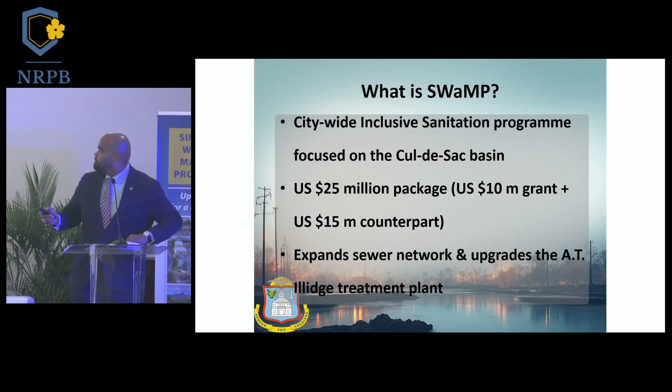More than 9,000 kilograms of nitrogen per year enters the Great Salt Pond. Yeah. And of course we have, thank you. And of course we have about 9,000 kilograms of nitrogen per year that enters the Great Salt Pond. A large part of that comes from effluent runoff of sewage systems. And of course, those are for two reasons. One, because of aging infrastructure challenges, but also because a number of persons, as I indicated earlier, continue to illegally dump raw sewage into our communities.

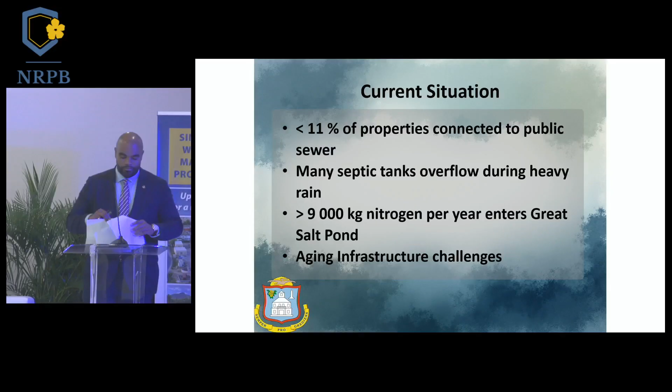Now, there are a number of key challenges that cause a lot of these problems, and that we aim to address through a number of interventions. One of the first challenges is rapid tourism growth over a number of decades, which has increased wastewater loads across our communities. Secondly, the supply chain delays. And thirdly, the issue of public awareness, community buy-in. Wastewater is out of sight, out of mind, a government's problem. And this we aim to change with this project. Wastewater is not a government problem. Wastewater is an us problem.

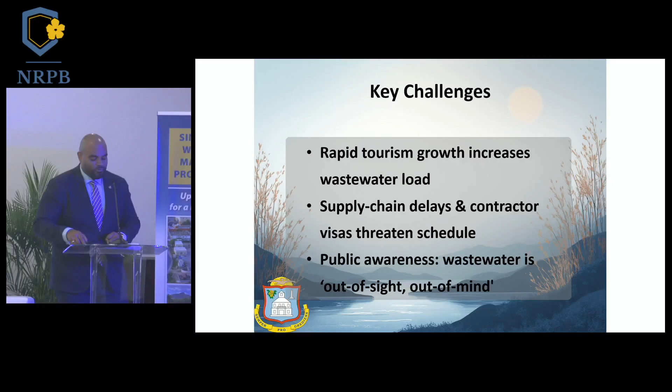So what are the project objectives? The first is to protect public health and marine ecosystems. Most naturally, a clean environment, better quality of life, and improved infrastructure due to the lack of sewage on roads safeguards our tourism, which is the backbone of our economy. And of course, provide reliable, climate-resilient sanitation for all persons.

The project itself has the following core solutions to achieve this. The connection of up to 1,400 new household connections in the cul-de-sac basin, the increase of treatment capacity at the A.T. Illidge Road wastewater treatment plant, and most importantly, what's really key today, the behavior change campaign. As Minister, I can put all the infrastructure in place to support and manage wastewater. But if as a community we continue to illegally dump or choose not to connect and not dispose of sewage correctly, we're going to have a problem. So it takes all of us in the community, and a very key part of the behavioral change campaign is what we as government are going to do to ensure compliance, but also awareness of how things should go.

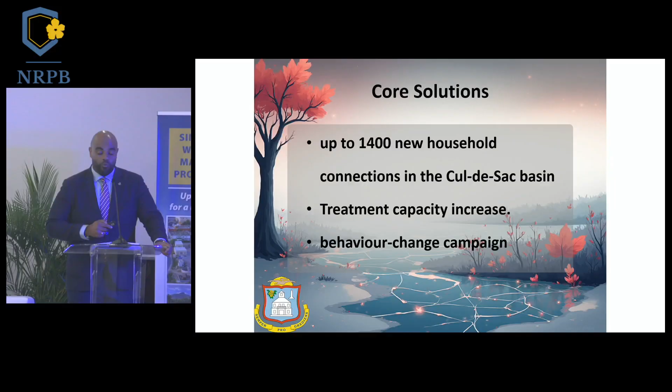So one of the key things we're focusing on, very much like our solid waste project, is the creation of a waste authority to manage the future of sewage wastewater treatment. Secondly, the introduction of household contributions. Back to Claret's statement from this morning, nobody thinks that paying more is sexy. But the reality is, if you don't pay for services that we need, what's even less sexy is sewage on the road. So a big part of how we manage the future of wastewater is through a very strong financial framework, which will include household contributions.

Now, finally, the project timeline. I won't go too much into detail, because I think this will be covered more by the project lead. But in short, 2024 will see a detailed design and the environmental impact assessment. 2025 will see procurement and contractor mobilization. So, of course, 2024 has already passed. 2025, looking at procurement and contractor mobilization. 2026, 2027, the actual project. So a large part of what's going to be happening is network construction and plant upgrades.

We're very, very aware that the cul-de-sac region is a naturally congested area. You either live there, one of your children goes to school there, you have a godchild going to school there. Most of the population has some element of activity going on in that area. So a large part of what we're going to be doing, in particular with the Ministry of Justice, is looking at how we mitigate the nuisance from the planned intervention. This includes things such as alternate routes in and out of the cul-de-sac area, scheduling and monitoring what happens in and out of that cul-de-sac throughout the day to mitigate the impact of large-scale construction.

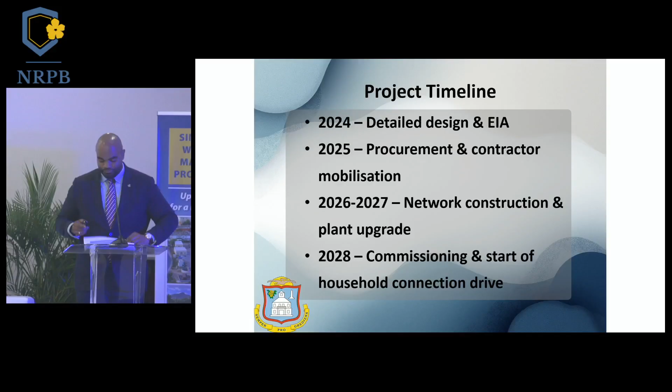Of course, the question always becomes, who benefits? And I think this figure is incorrect. It's definitely more than 11,000 residents who will gain direct sewer connection. The entire population, roughly 43,000 people in Sint Maarten, will enjoy cleaner coastal water.

Why? Because what we've seen over the past, at least from me as minister for the last year, you've witnessed a lot of persons who empty raw sewage into stormwater drains. So where naturally clean water should be running, you oftentimes see sewage water. That sewage water runs down the Cul-de-Sac basin, ends up in the ponds and into the sea.

Now again, not only for the sake of tourism, but also a large part of Sint Maarten does bathe in the Great Bay Basin. So it's not only about tourism, and I think the idea of this project is really to bring home that we have to stop looking at environmental protection as something for persons not from here or for tourists. It really does benefit us in our quality of life. No one wants to walk through sewage water or swim in it.

And then, of course, 1.5 million cruise tourists, 400,000 stayover guests protected from beach closures. As you can imagine, oftentimes, and it happens quite a lot on the front side, when there's a large amount of effluent into the waters, beaches have to close. And of course, if your economy depends on tourism, people lying on the beach means drink money. If you don't have that, you have an economic hit.

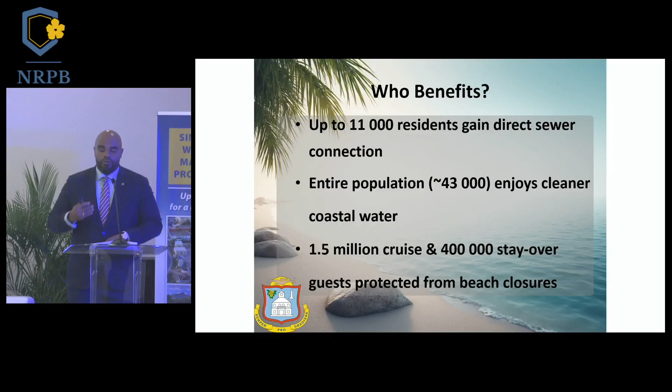At a glance, the benefits: health, fewer waterborne diseases; tourism, clean swimmable bays, and sustained jobs and revenue; environment, impactful nitrogen load reduction to Fresh Water Pond and Great Salt Pond. And of course, jobs. An estimated 120 construction jobs and an additional 10 to 15 long-term operation and management positions become available with the introduction of this project.

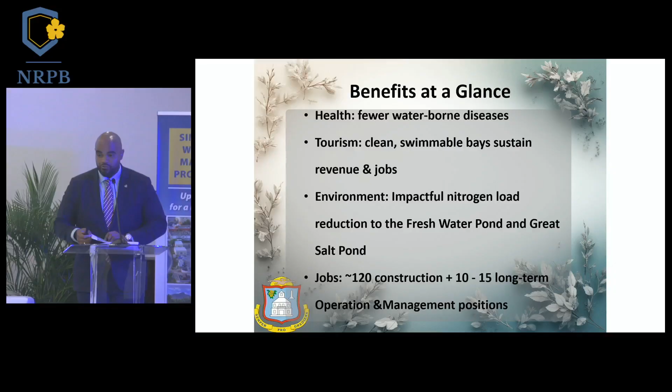So, what do we need from you? Connect early when sewer mains reach your street. I think that's very critical. A large part of this project will, of course, cover those connections as part of the project scope. So the earlier you get in, the more likely you are to be connected as part of the project budget.

Very simple, keep wipes, oils, and grease out of the drains. We don't have to wait for this project to come to Cul-de-Sac to start doing the right thing. Oil and sewage do not belong in our drains. And I can't recall how many times as Minister of VROMI I have been called: Minister, there's sewage running in my road. Okay, can you file an official complaint? No, I don't want my name out there, just send somebody to come and see.

The reality is, and I told everybody, it really takes community and all of us. Nobody wants to be known as a snitch, so to speak. But if you really look at what we're trying to do here, it's really about community engagement and doing your part. Being a good neighbor is more than just sharing a mango or some sugar. It's really about making sure that what you wouldn't want for yourself, you don't do to other people as well.

And most important for everybody, both online and here, share your feedback. There is an active QR code in the front, and I think it will be shared online as well. And your emails with any questions, and really stay engaged about this project or what we're doing as a government.

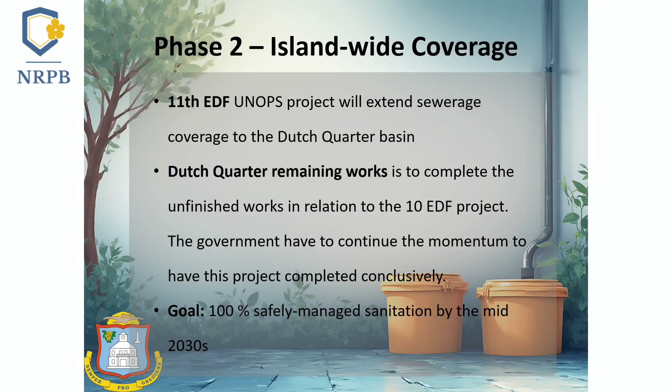So I'm actually very happy to announce here today the 11th EDF, which is a project I remember from my time at Foreign Affairs when we did this back in 2013, the signing of this agreement for the finalization of the Dutch Quarter Basin community connections, which have never actually materialized. We recently, as Ministry of VROMI, with UNOPS, signed on to an agreement to extend sewage connections in Dutch Quarter. This year, we finalized the connection of the lifting station.

And of course, we're very proud to announce as well that in tandem with the United Nations Office for Project Services, we will be finalizing those connections for the homes in Dutch Quarter at the same time that we're doing this project in Cul-de-Sac.

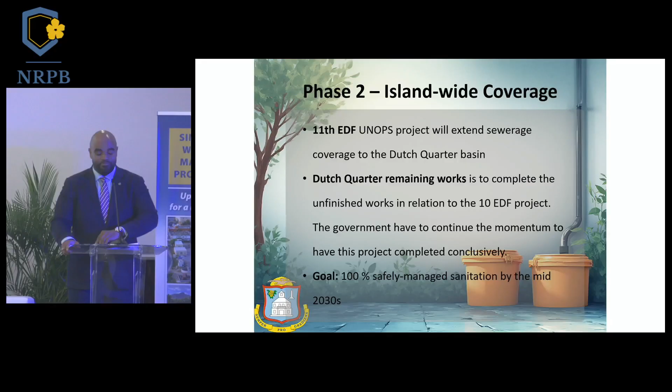So very important is to be aware there'll be a lot of infrastructure projects in the next 18 months, starting in Q4 of next year. We're very proud of it, of course, because there's some long-standing issues within the government that are still pending, but we are very cognizant of the fact that we have to do a lot of mitigation work to sort of minimize the nuisance of infra projects in the densely populated areas of the country.

The remaining works, of course, will be completed, and the government has the continued momentum to ensure that the project is completed successfully. And finally, the goal is 100% safely managed sanitation by the mid-2030s. In closing, wastewater management is community engagement management. Let's act together so that what's flushed in the cul-de-sac basin doesn't end up in Great Bay.

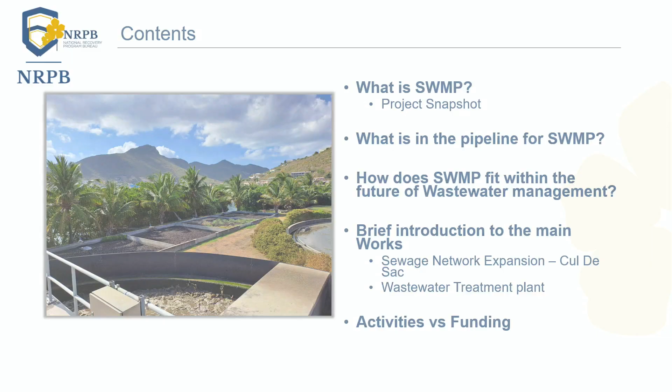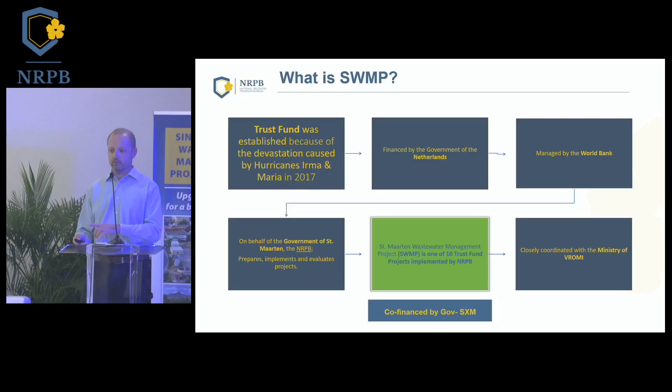So just a brief story of where this project is coming from. The trust fund, as you know, was established after Hurricane Irma in 2017, and based on the funds mobilized by the government of the Netherlands and managed by the World Bank, the NRPB was created on behalf of the government as an implementing unit. Out of this, 10 projects were identified to implement the funds. One of those is the one we are presenting now, SWMP, the Sint Maarten Wastewater Management Project. The official start date was in August 2024.

The funding was already mentioned by the minister, but outside the 25 million that are already being mobilized, there are potentially 5 extra million that are going to be confirmed, and they're going to be part of the funding as well.

The main objectives of this project are not only the infrastructure that was presented, the expansion of the network and the upgrading of the plant. It's also going to strengthen the capacity of the sector, more specifically the Ministry of VROMI, to cope with the challenge of wastewater management in Sint Maarten.

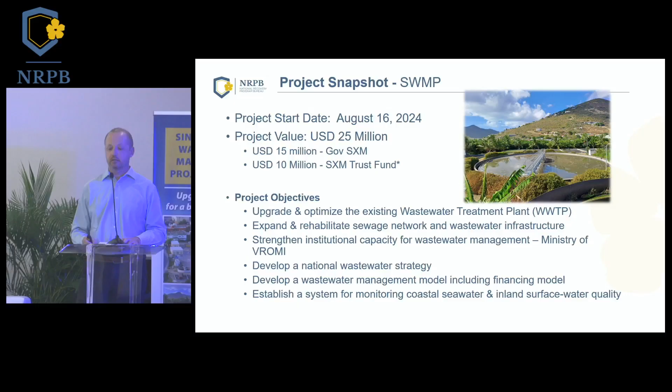Support also the development of a national wastewater strategy to guide policy for future expansion, and also develop a model, including a financial framework model, to ensure sustainability of the system, because once all the infrastructure is done, we have to ensure that it is going to be sustainable.

And finally, one of the objectives of this project is to establish a system to monitor the quality of the seawater in the coastal area and also in inland water bodies.

In the pipeline, immediately we have the main engineering project, which is the expansion of the wastewater network in Cul-de-Sac and improvements of the plant. More technical details will be provided in this presentation. We also had an independent review of the sludge management approach. As you know, dealing with the sludge produced in the wastewater treatment plant is a high-risk activity.

Early next year, we'll start conducting an inventory of households that are potentially going to be connected to the network. So we need to make this inventory, and also have an overview of how the individual connections have to be done, the budget and everything, before contracting the next contract, which is the extension of the network, but also the private connections that have to be done in parallel. I will show you a schema right now.

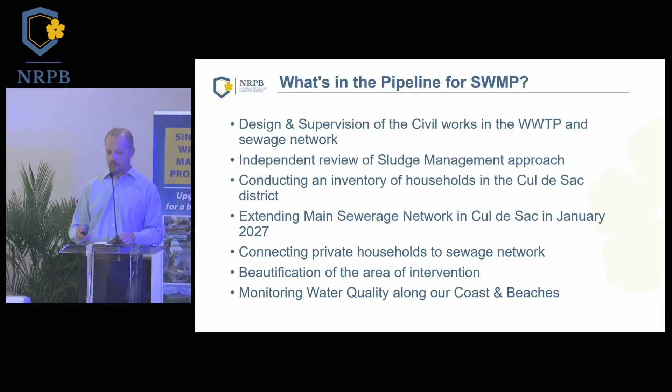And finally, in order to implement the last objective I presented earlier, we are going to start with the monitoring of the water quality, first to see how this intervention is affecting the environment in terms of improvement.

So in order to understand how this project fits with the future of the sector, one of the objectives is to support the government's roles as a planner and as a regulator, because these figures are now a bit vague in legislation. This project will also support updating the policies and ordinance that are now in application, but there are some gaps in this legislation. So we are working with the Ministry of VROMI to upgrade these policies and this legal framework.

And also to support the institutional strength of the Ministry of VROMI as a regulator and policymaker in the sector, and to create a sustainable financial model to ensure that it's going to be sustainable in the future.

Also, one of the objectives related to the sector is to promote partnership and innovation. So private sector engagement is very important, and to support the national wastewater strategy to ensure the future expansion is done following the policy. And the main focus of the overall intervention related to the sector is, as the minister mentioned earlier, to reduce the pollution in water bodies.

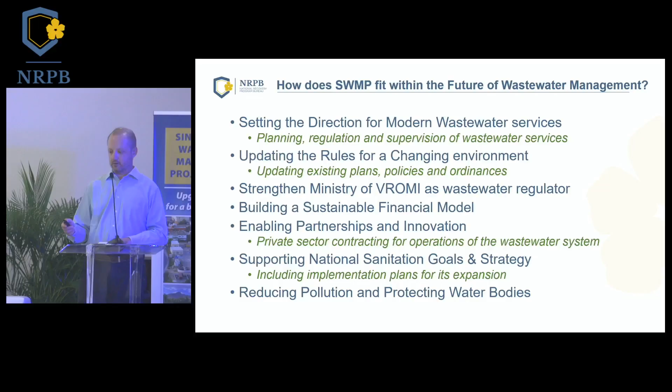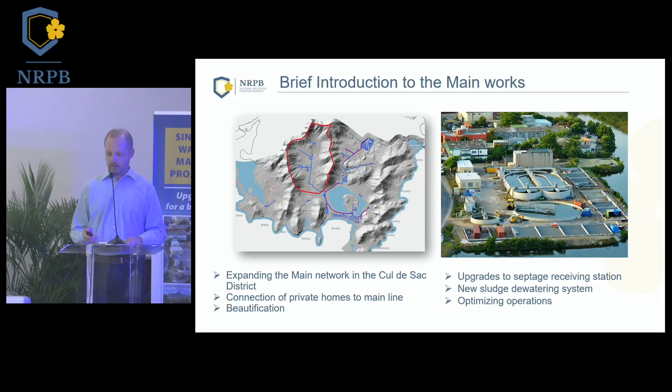So more precisely, the area of intervention of this project is going to be Cul-de-Sac, with some particularities that I will explain, and also the improvement of the treatment plant in Fresh Pond. The expansion is in the design phase. We are now only on the design. It's the picture you see on the screen.

So the design is taking the whole Cul-de-Sac right now. These are the red pipes you see on the screen. The black spots are the condominial systems that already exist. So this project will connect those condominial systems that are now disconnected to the main system, and then connect the whole area to the treatment plant.

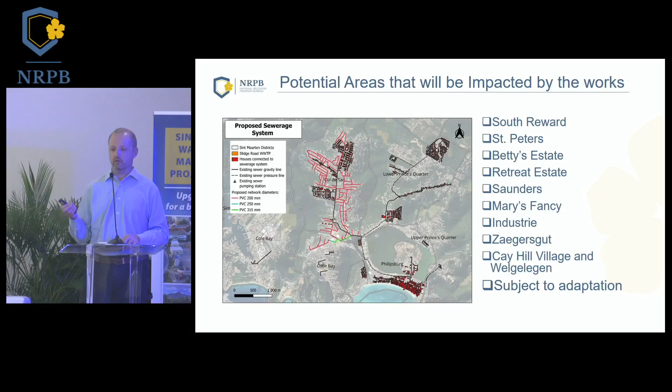Also ensuring that the improvements that are going to be done in the plant will absorb any future development in Dutch Quarter, as the minister just mentioned earlier. These two projects are also in the pipeline. This is in the design phase. But these are the areas of Cul-de-Sac that we are now working on with the Ministry of VROMI for the design of the network.

The intervention in terms of private connections is going to be in parallel. So at the same time that we are working on the expansion of the network, in parallel, we're working on the private connection, because at the same time that the pipes are installed in the street, we have to ensure that the connections are done, so we don't have to intervene twice in the same place, bothering the population twice. So we do everything at the same time.

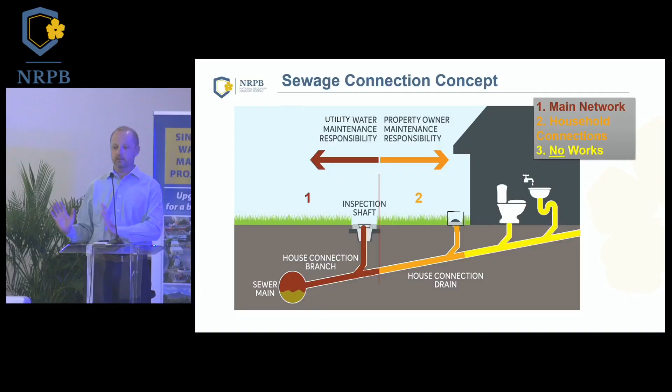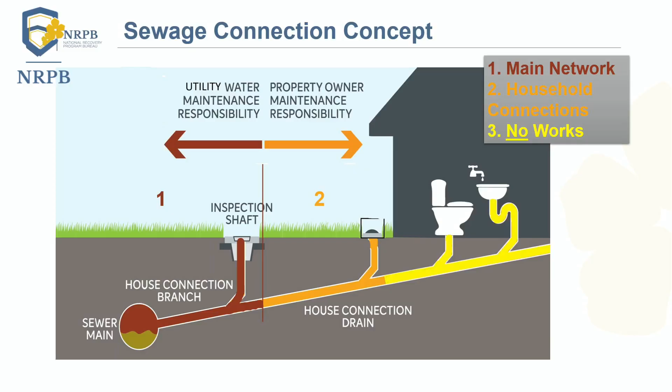So in terms of private connection, this picture is self-explanatory. But essentially, the brown color on the left is the main project, the main pipes that are going to be installed. The orange, which is the private domain, will be the second contract that will run in parallel. So at the same time that the construction company will be installing the red pipes, the left side, the construction company will be connecting households, the orange phase.

But we have to keep in mind and not forget that the yellow part is the responsibility of the owner. So this project is not intervening within the buildings. This project will not repair piping, kitchens, bathrooms. So the intervention is from the connection box, the house connection drain, till the main pipe. So the area of intervention is 1 and 2, red and orange. Yellow is the responsibility of each household.

But we have a big challenge in this project. I presented the whole area of intervention, the design that we are working on with the Ministry of VROMI to develop the whole design or engineering project, but we have a gap of funds. If we take on the left side the goals of this project, which are the private connection, the beautification, the network, the support to the Ministry of VROMI and the regulatory framework, sustainable financing, we have available financing only for a percentage of these goals.

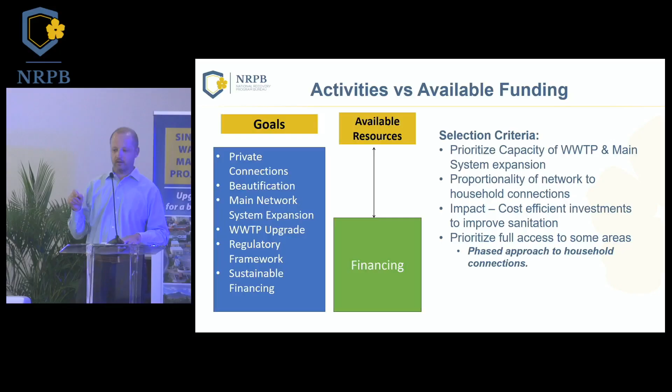So because of this gap, we are working with the Ministry of VROMI to identify, and this is very important, within the area of intervention, the highest priority sub-areas. So in this list of neighborhoods in Cul-de-Sac that I presented before, we are working to identify where the priorities are, following criteria that have been agreed by the Ministry of VROMI, which is essentially to prioritize the impact of cost-efficient investment.

So when installing pipes, we have to see how many people are going to be connected. It's not the same installing a pipe where only 2 buildings are going to be connected and a street where many others are. So there are a lot of elements to take into consideration to make the prioritization. So we are working on this. We cannot anticipate the areas. We are just saying that it's going to be within Cul-de-Sac.

So basically, yep, that was the last slide. So basically, the challenge that we have now is this identification of the main areas of intervention. And that's it.

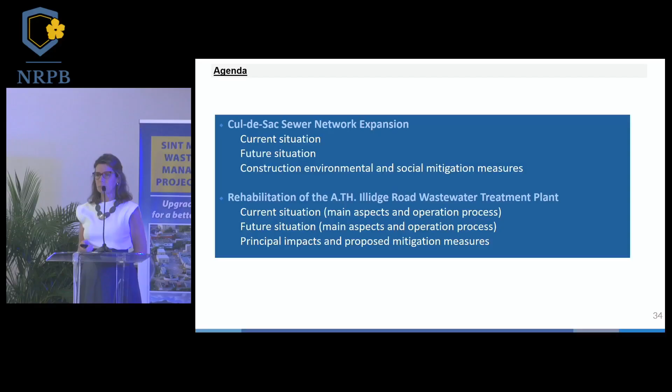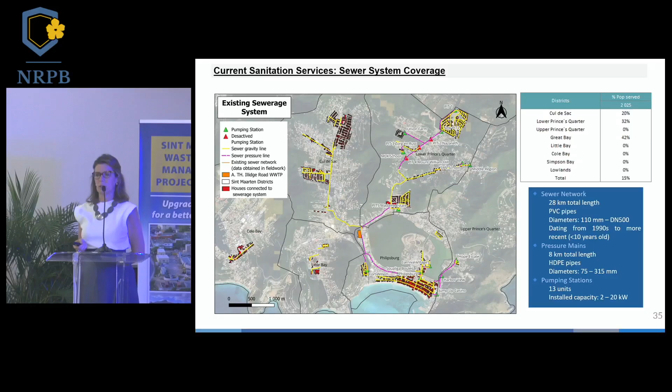Okay, so you can see in this slide the layout of the existing sewage network. You've got highlighted the houses or the buildings that are currently connected into the sewer system. And in yellow is the layout of the existing sewer network. There are about 28 kilometers of pipe work in place, mostly PVC pipes, with diameters varying from 110 millimeters to 500 millimeters. This network was built from the 1990s onwards. Some of it is quite recent.

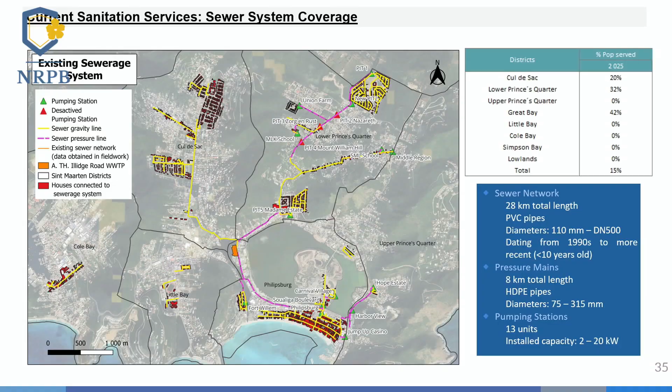There are also some pumping stations and pressure mains that lead all the sewer system into the wastewater treatment plant, which is located in this area. There are presently 13 pumping stations working. Over here you can see highlighted the areas that are presently sewered. Over here there's a main sewer line that goes down LB Scott Road and all the way into the wastewater treatment plant.

There's the Ebenezer and South Reward areas that are sewered; they have a sort of simplified sewer system with small diameter pipes, a lot of them laid in private properties, and we call this a condominial system, which then connects into the main public sewer system. This network has quite small diameter pipes, so VROMI hasn't been able to do an inspection in these pipes and do a rigorous cadastre of the existing system.

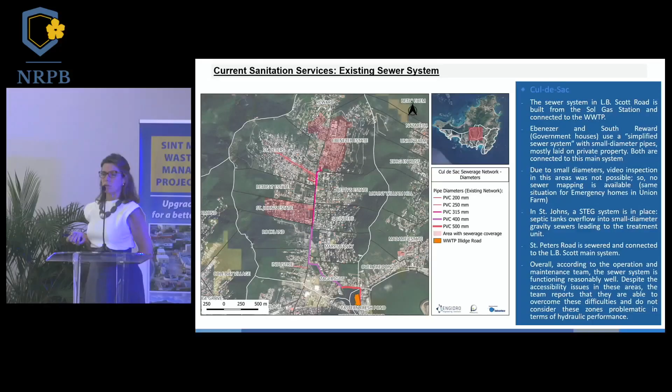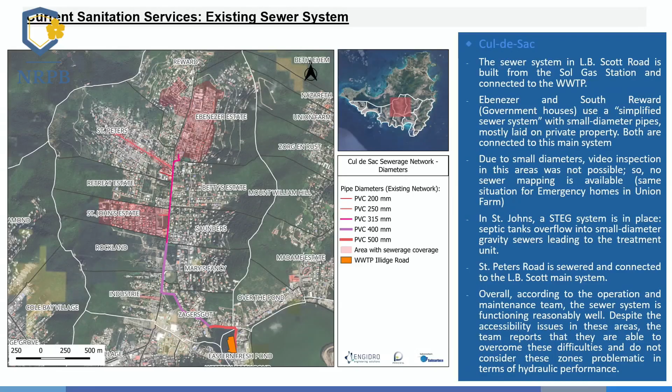In St. John's, down here, a STEG system is also in place. This is a system where septic tanks exist and overflow into small diameter pipe work. It's all a sort of gravity system. St. Peter's is also sewered and connected into the LB Scott system. According to our appraisal and discussions with the operators, the system functions well. Any issues that arise have been resolved by the operation teams.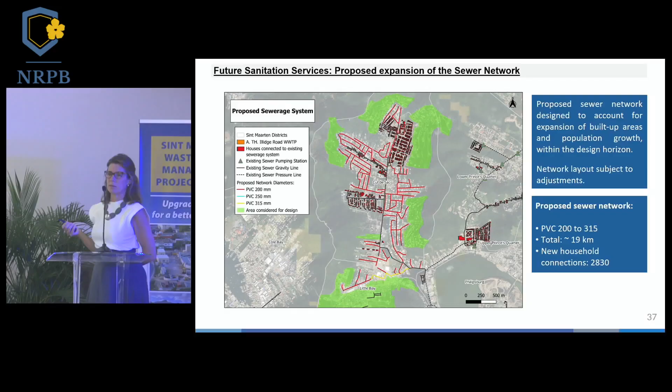Then you've got in red all the pipework that will be designed as part of this project. This will have diameters in PVC from 200 to 315 millimeters. It comprises more or less 19 kilometers of sewer network and 2,800 sewer connections. It's important to keep in mind that this isn't going to be one project built at this moment. It's going to progress as time goes on.

The government will make a development plan for implementing all this pipework. So it'll be work in progress. Some part of it will be built as part of this investment and this financing that the Minister has mentioned. And as part of work in progress, the rest of the sewer network will be built at later stages.

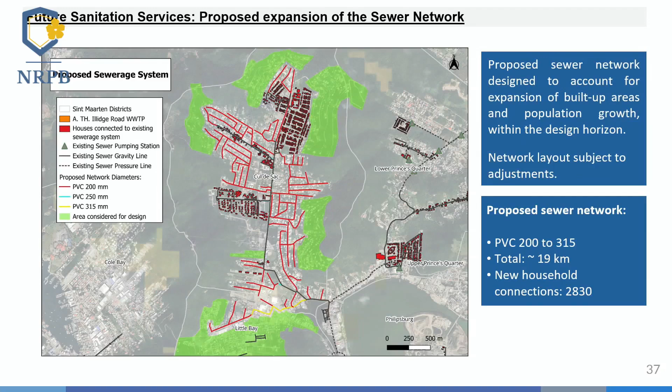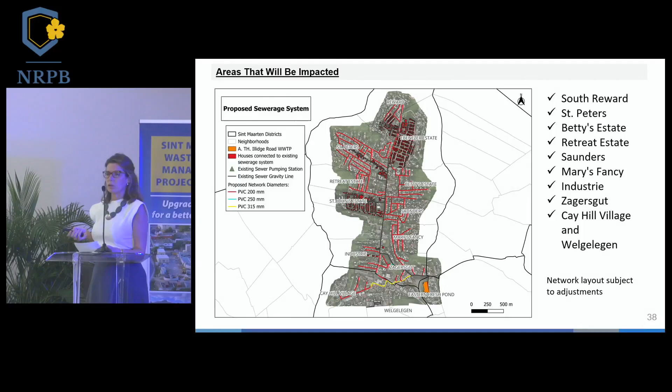Over here is a detailed image of the neighborhoods that will be covered by the sewer network, which will include South Reward, St. Peter's, Betty's Estate, the Retreat Estate, Saunders, Mary's Fancy, Industrie, Zagersgut, Cay Hill, and Welgelegen. The network layout may be subject to minor adjustments as the project progresses, but this is the basic layout we are considering.

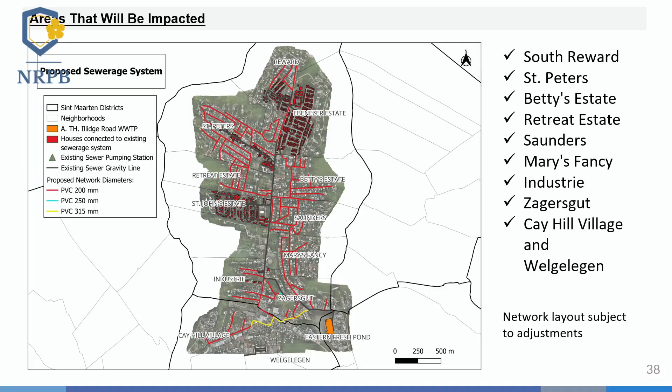So we have works that may take place in private properties. There will probably be noise and dust from the traffic and the trenching activities. There will be accessibility issues regarding the connection with the houses because there will be trenches and they have to have connections. The most important is the traffic disturbance because this will be done on streets, on roads. There may be closure of some streets and also detours of the traffic.

Excavated soil will be removed frequently. The community will be informed in advance about upcoming works. Trenching lengths will be kept as minimal as possible and closed as soon as possible also.

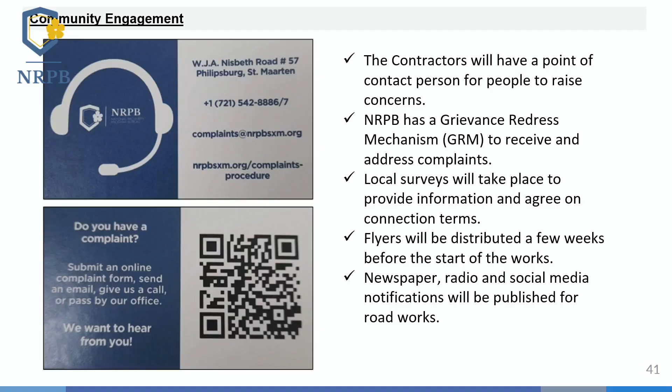Okay, I will give the word to my colleague now.

Okay, so the wastewater treatment plant at Illidge Road over here is the only public wastewater treatment plant that exists in Sint Maarten. It was originally built in 1992 and had a major refurbishment in 2013. It is designed to service the Greater Philipsburg area, which includes the Upper Prince's Quarter, the Lower Prince's Quarter, and other sewer districts already covered by sewer networks, and also, of course, the Cul-de-Sac.

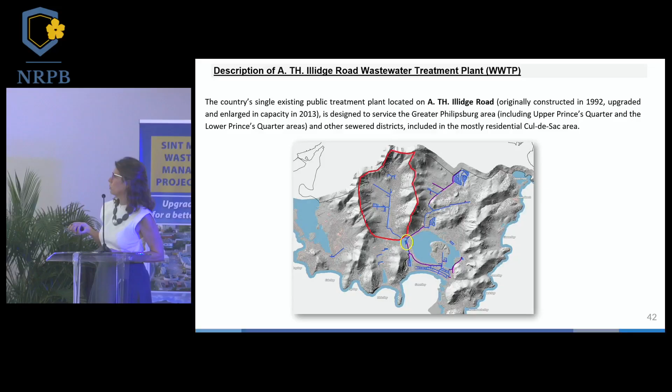The wastewater treatment plant was designed for a capacity of 38,759 inhabitants and has a total capacity of 4,715 cubic meters per day. This is the design capacity. It's not the flow that goes into the wastewater treatment plant. Just to have an idea, this would correspond to 2 to 3 Olympic swimming pools per day. The facility occupies an area of approximately 1.12 hectares. That would mean approximately 2 football fields.

Over here you can see in the first photograph, sorry. The wastewater treatment plant also receives the septic trucks, emptied regularly and transported to the treatment plant. These are emptied into a pit and then sent into the treatment process. Okay, the volume that arrives in septic trucks is quite significant. It's 20 to 30% of the total influent volume. And during the wet periods where there's a larger overflow of the septic tanks, this proportion is even higher.

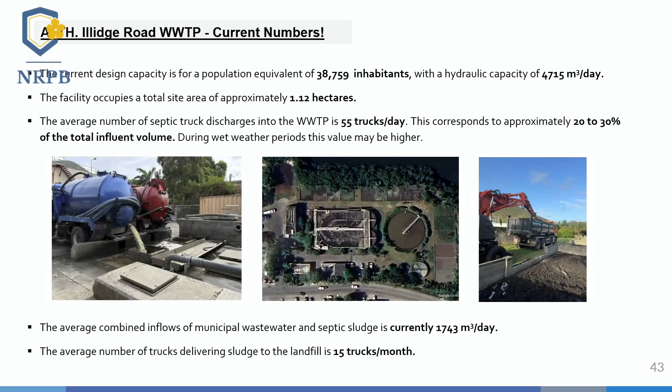The average inflow into the wastewater treatment plant is 1,743 cubic meters per day at this moment. The treatment plant produces sludge that's dried in drying beds and then sent to landfill. And approximately 15 trucks of sludge are sent every month to landfill.

Okay, future numbers. To design the refurbishments in the treatment plant, we've done population projections for the years 2030, 2040, and 2055. The population will grow from the present 27,700 inhabitants to 33,300 in 2040, 38,000 in 2055. So the wastewater flows will grow approximately 40% from 4,600 to 6,400 cubic meters per day. So we'll go from more or less 1.8 Olympic swimming pools per day to 2.8 Olympic swimming pools per day.

The facility will be contained within its current limits of 1.12 hectares. As the network expands, the number of septic discharges into the wastewater treatment plant will be reduced. And we estimate at the project horizon that there will be about 17 trucks a day emptying into the treatment plant.

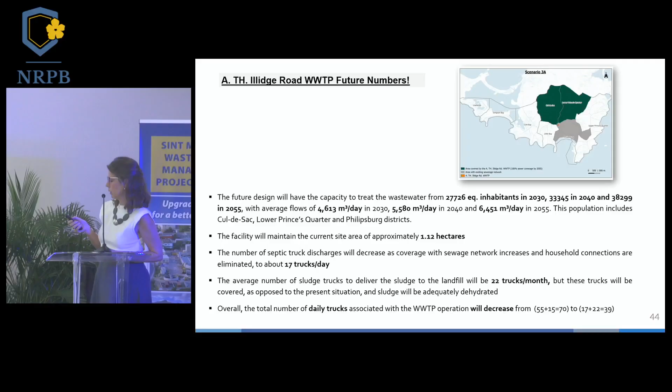Okay, over here to show you the layout of the treatment plant. We've got in this area the area where the trucks empty the septic tanks into the wastewater treatment plant. The flow will go from here into the treatment line, into a pumping station in this area. And over here, the wastewater will be subject to fine screening. This aims to remove solids from 6 millimeters upwards from the wastewater treatment plant.

From here, the wastewater goes into the biological process, which is done in these tanks. So we've got a collection of what we call selectors and anaerobic tanks, and this large aerobic oxidation ditch. This is a very resilient process. Basically a large volume of wastewater circulates in this area. It goes from aerated areas to mixing areas.

And in this process, basically the organic matter that's present in the sewage is decomposed by the bacteria that's cultivated in these tanks. The bacteria consumes the organic matter, and basically it promotes a biological treatment of the wastewater. It's also very effective to remove phosphorus and nitrogen from the wastewater.

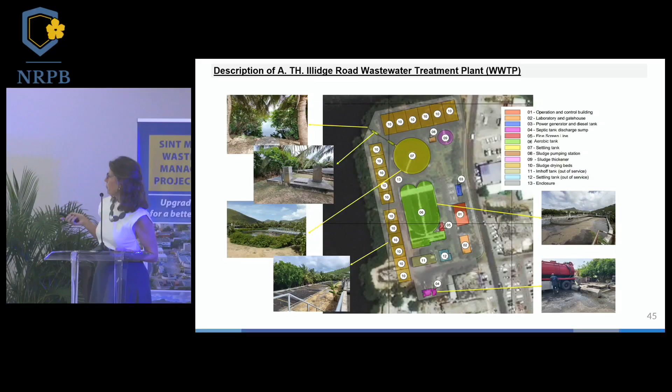What we're going to do in this plant is we're going to put over here a concrete barrier behind the area where the septic trucks are emptied, to protect these houses over here, these buildings, from splashes that can occur while the septic tanks are emptied.

Over here, we're going to build an area to do some finer treatment of the septic sewage. So we'll do a screening of the septic sewage, and it'll be connected from the trucks through a pipe connection into the pre-treatment station and then sent to the sump. And that will also prevent odors and vectors of the raw sewage being spread in this area.

Over here, we're going to duplicate the fine screens just to give more resilience to the plant. We're also going to replace the mechanical equipment that's in this tank, as it's been here for some years. This part of the plant was built in 2013, and by now it's in need of replacement, even though it is actually working well still, but we did want to reduce risks of future maintenance problems.

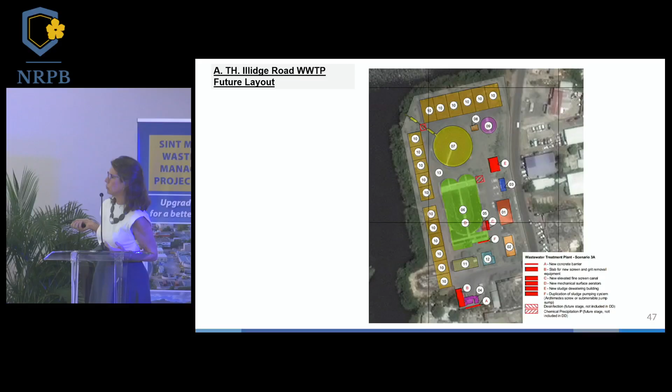Over here in the operating building, we're also going to replace the SCADA system to modernize the automation of the treatment system.

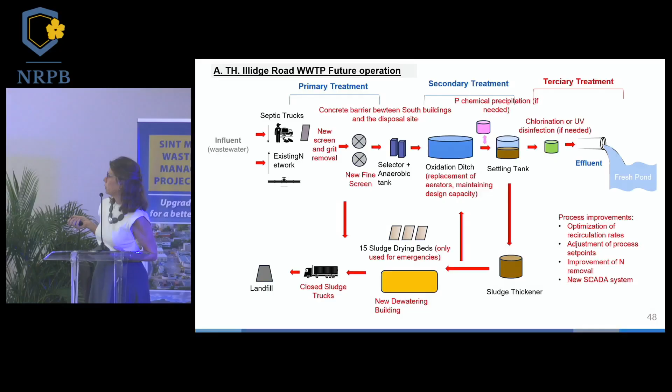This is the same scheme, but just referring the various processes we've mentioned. I forgot to mention in the slide before that in the future we can, if needed, install a chemical precipitation of the phosphorus. This will be installed only if required at some future stage, because there are some risks associated to storage of chemicals and also the buildup of sludge.

And also a chlorination system or UV disinfection system can be installed at a later stage if the water quality or demands in the fresh pond would demand a disinfection system.

And also what's planned is that the sludge will be transported in closed trucks so that the populations around the plant won't feel the impacts of the sludge transportation.

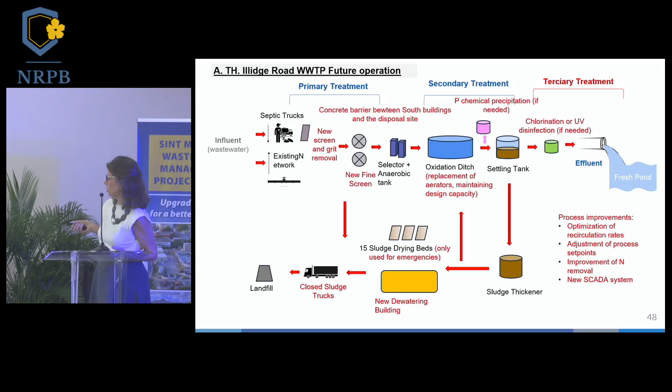Okay. Thank you very much again.

I will focus again on the environmental and social impacts, now on the wastewater treatment plant. There are some important impacts, but I will focus only on four, mainly on odor, noise, sludge management, and the quality of the effluent discharges in the fresh pond. There are other impacts, but I think these are the main impacts that we can focus on.

Regarding the odor, we analyzed the current situation around the wastewater treatment plant. We did two approaches. First, we did a local survey with face-to-face interviews with about 120 people living nearby the wastewater treatment plant, either residents or business owners. And the replies were that the odor is not an important nuisance. However, they say that the septic trucks, when they arrive at the wastewater treatment plant, may emit some odors, but it's not an important impact.

We also ran a mathematical model to see the impact of three specific compounds that are associated with the wastewater treatment plant. For instance, we have the hydrogen sulfide that has a rotten egg odor. We have the ammonia that smells like urine. And we have also the methanethiol that smells like rotten cabbage. So it has a distinctive smell that is always associated with wastewater treatment plants.

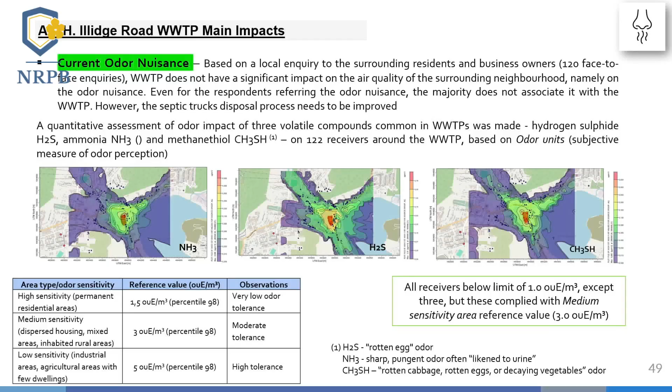We did that mathematical model, and we found out, based on reference values of the Netherlands legislation, which is very strict, that all the sensitive receivers that we identified are complying with these legal thresholds of the Netherlands legislation. So currently, it seems that the impact of the wastewater treatment plant for the odor is negligible. We did the same for the future situation.

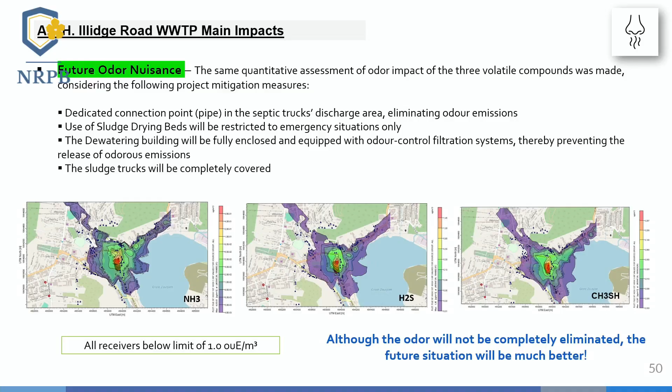So we are going to implement some project mitigation measures, as my colleague explained to you. In the discharge of the septic tanks, as you saw in the earlier photo, nowadays the trucks are discharging the septic without any protection. So there are splashes, and now we will have a connecting pipe, so there will be no discharges and no odor. So this is a very important measure.

The sludge drying beds, which are the main source of odor, also will be deactivated, as Victoria said, and will be replaced by the dewatering building that will have better, drier sludge with less odor, and we'll also have filters for odor. So the project that we are implementing will improve the situation. It's not bad, but it will be better.

And the other mitigation that is very important: the sludge trucks now are not covered. So when they are going to the landfill, the odor is felt. Now the dewatering plant will have a connection directly to containers, so the odor will not be felt. So these four simple project measures will enable a better air quality for the surrounding neighborhoods.

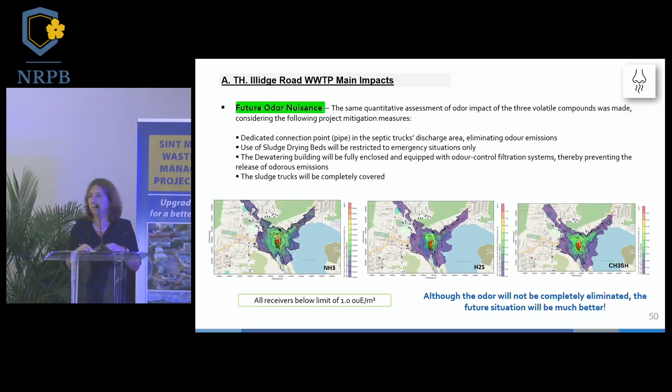Sorry, too fast. Now, regarding the noise, we also asked about it in the local survey. Do you hear noise from the wastewater treatment plant? And the replies were also no. It's not a significant impact. But as for the odor, the trucks sometimes, when the wind is calmer, that was their reply. When there is no wind, they sense the noise of the trucks.

The concrete barrier that will be placed between the southern buildings and the discharge of the septic trucks will also mitigate the noise impact for those south buildings. There will be replacement of the mechanical equipment for the aeration tank that could have insulation. Nowadays, there is higher technology equipment, so since we are going to replace it, let us replace it with better equipment.

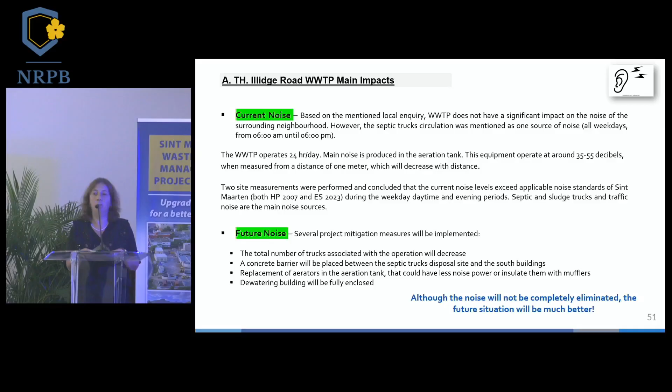And also the dewatering building will be new equipment in the wastewater treatment plant. It will be fully enclosed so that we don't have a noise impact. So, as I said for the odor, the noise will be better with the future upgrade of the wastewater treatment plant.

Another impact that is also important is the sludge management, because we'll have a higher number of trucks, as my colleague said, because of the population increase. We have more population connected to the wastewater treatment plant, so we'll have more sludge. But the dewatering process that we will be implementing is better because the volume of the sludge will decrease. And the other important aspect is the containment of that sludge in the trucks.

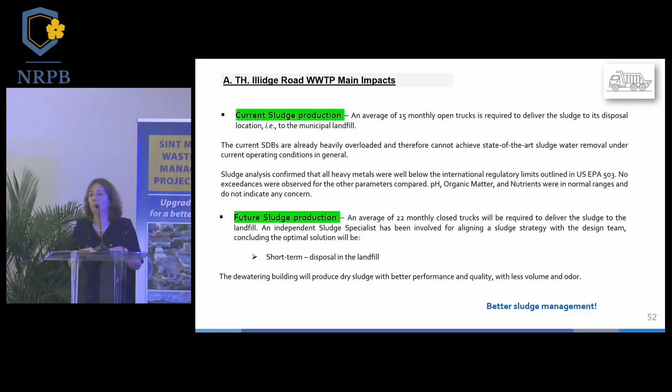So we will have less volume, better quality, and less odor, and the sludge is not contaminated with heavy metals. So this is important. Maybe a future use on other sources than the landfill could be predicted. So we have also a better sludge management in the future upgrade.

The final impact, I think, is the most important, because Fresh Pond is an important bird area. I'm a biologist also, and we have to have concerns about the biodiversity in that area. We have made an assessment of the effluent quality that is currently being discharged in the Fresh Pond. And with some upgrades that the experts from our team talked about with the current operator, this effluent quality complies with the legal thresholds.

Especially phosphorus and nitrogen could cause a growth of algae in the Fresh Pond. So they are complying, and the wastewater treatment plant is functioning properly. But we want it to function better. So that's why we are improving it.

For the future effluent quality, I think the main positive impact is the expansion of the sewer network. As the minister said in the beginning, if we expand the sewer network, there will be less runoff of non-treated wastewater to the Fresh Pond. So that is the major impact and the major difference with the current situation.

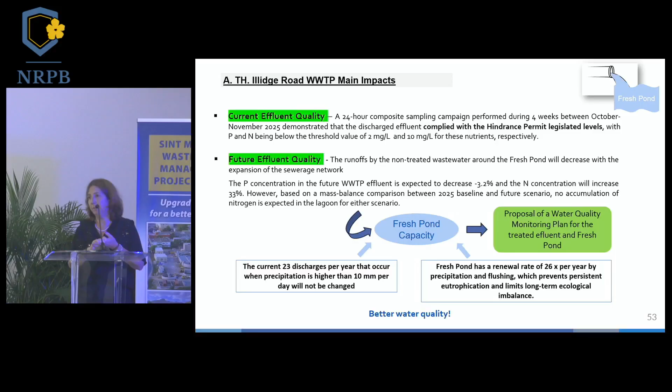Now just a few aspects of the construction stage. As we said earlier for the sewer network, these are some construction aspects that I wanted you to understand. Works will be limited to the existing facility. There will be no construction outside the facility of the wastewater treatment plant. The construction site will be placed inside the facility, so we are not expecting that other areas may be occupied. The main works will be some land movement with some trenches for the hydraulic system, and civil works for the dewatering building. It's a small building, so it will not take much time, and the trenches.

The construction waste will be properly conditioned. The construction phase is also expected to last no more than 12 months, so it's a short period. As for the sewer network, the construction will be performed only during daytime, at working hours. And as for the sewer system, a grievance redress mechanism will also be implemented. Just to finish.

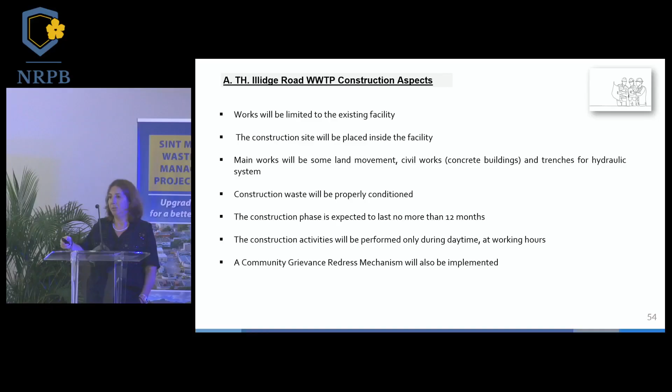Okay, just to conclude, the proposed sewer network in the cul-de-sac area is designed to cover the already developed areas and the expansion that will happen up to 2050, and also taking into account population growth, which includes growth in tourism within the design horizon. And along this period, to 2050, 2,830 new household connections will be built.

An important aspect of this project is that the sewer overflows into the surface water will be reduced, and also the construction stage will adopt various mitigation measures to avoid nuisance to the nearest households and commercial and service areas, and also manage traffic disturbances, which are inevitable during the sewer network intervention.

The upgrade of the wastewater treatment plant will improve the treatment process. It'll improve the resilience of the plant and also allow the treatment of more households from the cul-de-sac, Lower Prince's Quarter and Philipsburg districts. The total number of trucks required for emptying septic tanks will be reduced, and the transportation of sludge will also be decreased.

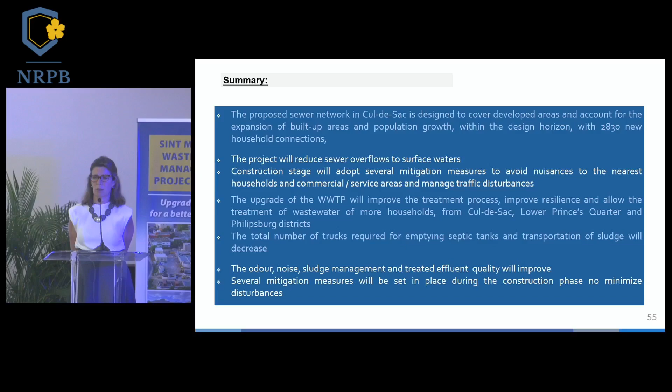The odor, noise, and sludge management and treated effluent quality will improve. Several mitigation measures will be set in place during the construction phase to minimize disturbances.